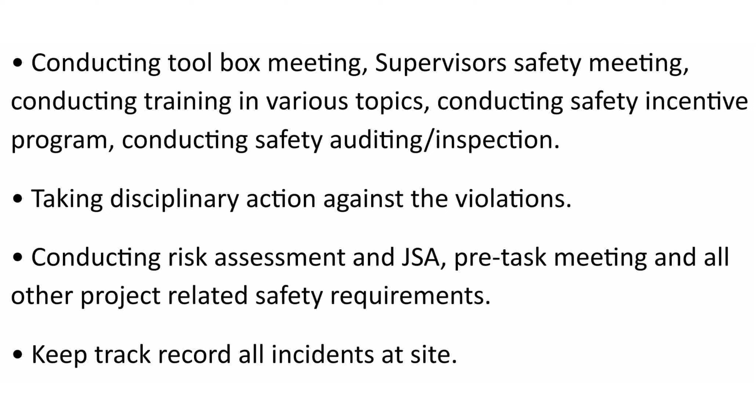He is to investigate hazards and dangerous occurrences, examine the cause of accidents, carry out safety inspections on site, and see what remedial steps and actions have been undertaken.

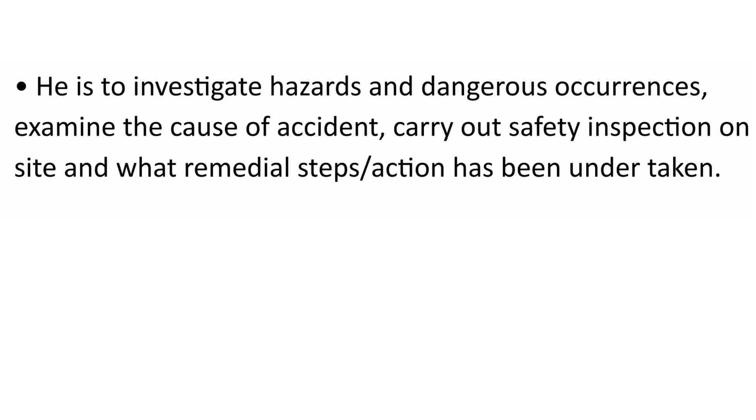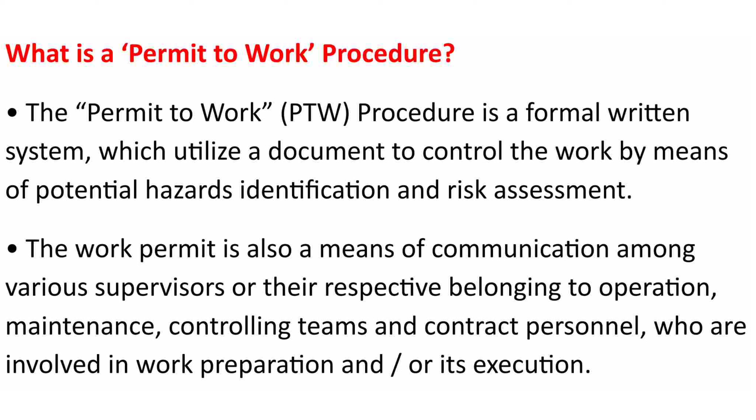Question: what is a permit to work procedure? The permit to work, PTW, procedure is a formal written system which utilizes a document to control the work by means of potential hazard identification and risk assessment. The work permit is also a means of communication among various supervisors or their respective teams belonging to operation, maintenance, controlling teams, and contract personnel, who are involved in work preparation and/or its execution.

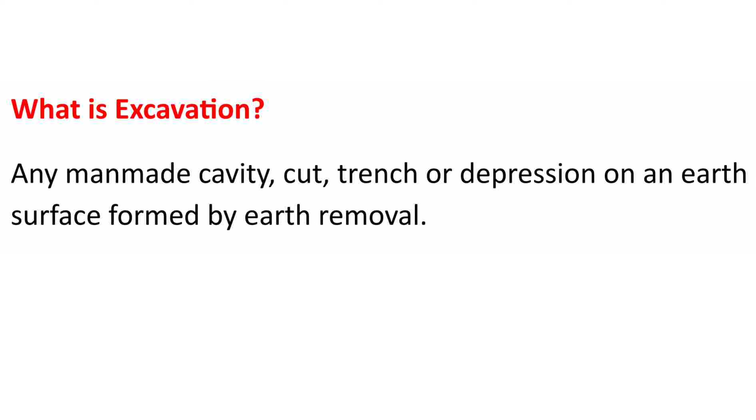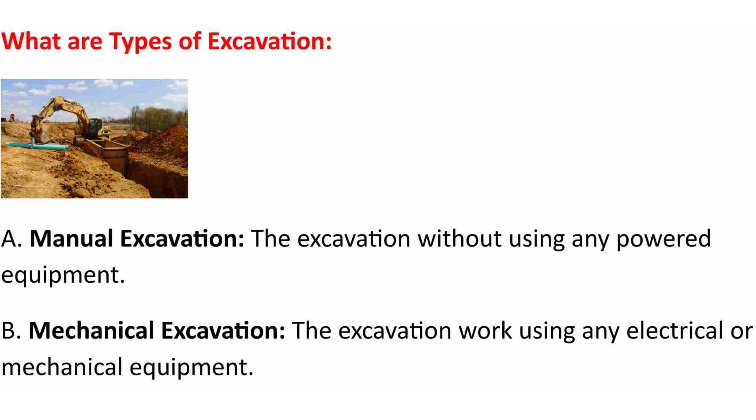Question: what is excavation? Any man-made cavity, cut, trench or depression in an earth surface formed by earth removal. Question: what are the types of excavation? A. Manual excavation, the excavation without using any powered equipment. B. Mechanical excavation, the excavation work using any electrical or mechanical equipment.

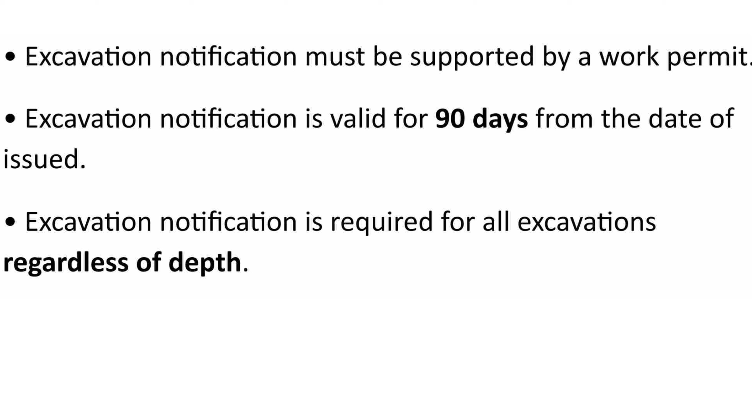Question: explain about excavation notification. Excavation notification is a document to notify concerned authorities who have responsibility and jurisdiction for safety and integrity of above-ground and underground services existing at the proposed site of excavation. Excavation notification must be supported by a work permit. Excavation notification is valid for 90 days from the date of issue. Excavation notification is required for all excavations regardless of depth.

Question: why is excavation notification required for excavation? Excavation notification gives detailed information about the underground facilities, and it is to be signed by all KOC concerned departments to confirm that the proposed excavation location has been identified and all safety measures have been taken for the existing underground facilities.

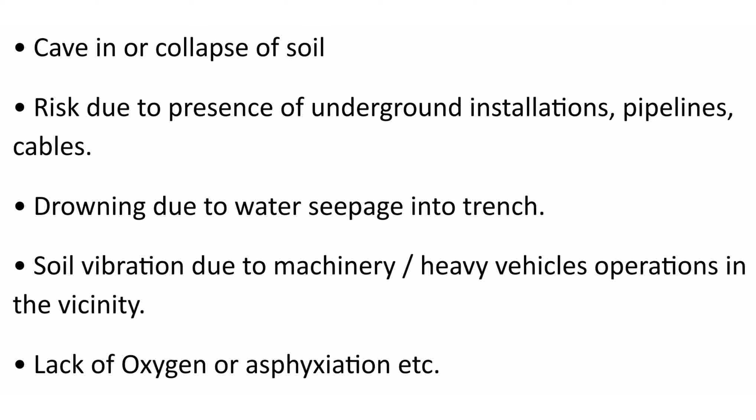Question: what are excavation hazards? Cave-in or collapse of soil, risk due to presence of underground installations, pipelines, cables. Drowning due to water seepage into trench. Soil vibration due to machinery and heavy vehicle operations in the vicinity. Lack of oxygen or asphyxiation, etc. Underground obstruction or damage to buried pipeline services.

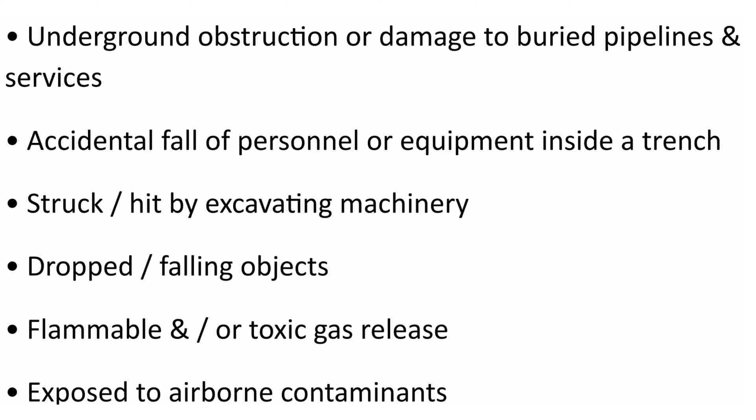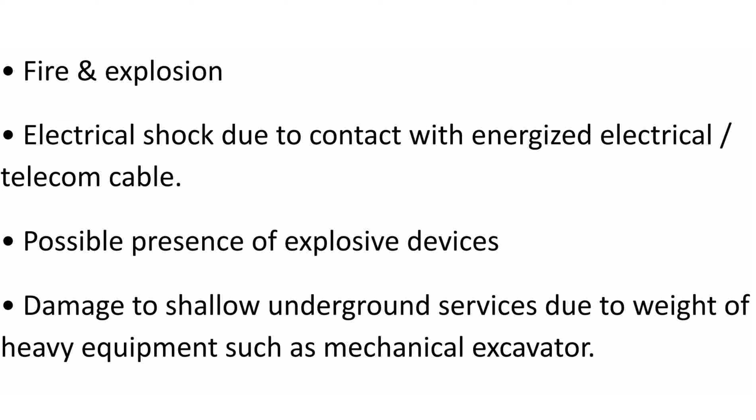Accidental fall of personnel or equipment inside a trench, struck or hit by excavating machinery, dropped or falling objects, flammable or toxic gas release, exposure to airborne contaminants, fire and explosion, electrical shock due to contact with energized electrical or telecom cable. Possible presence of explosive devices, damage to shallow underground services due to weight of heavy equipment such as a mechanical excavator. Encountering wet soil mixed with water, or reaching the water table.

Question: what are the safety precautions required for a safe excavation? No excavation work in KOC area without clearance of explosive ordnance disposal, EOD. No mechanical excavation closer than 5 meters to any hydrocarbon carrying pipeline. No mechanical excavation closer than 3 meters to non-hydrocarbon carrying pipelines, cables, and services.

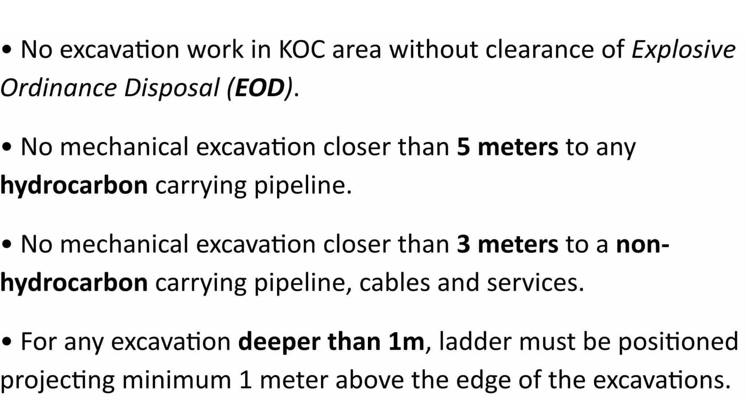For any excavation deeper than 1 meter, a ladder must be positioned projecting minimum 1 meter above the edge of the excavation. Ladders shall be provided every 7.5 meters, 25 feet, of lateral travel in the trench. Ladders shall be securely supported at the bottom as well as at the top. Excavated material shall be placed 1 meter from the edge of the excavation for depth up to 1.2 meters. Accordingly, placement of excavated material shall be increased in proportion to the depth of excavation.

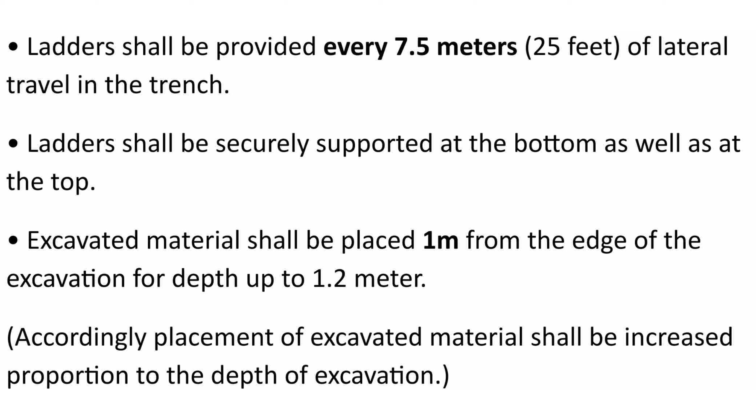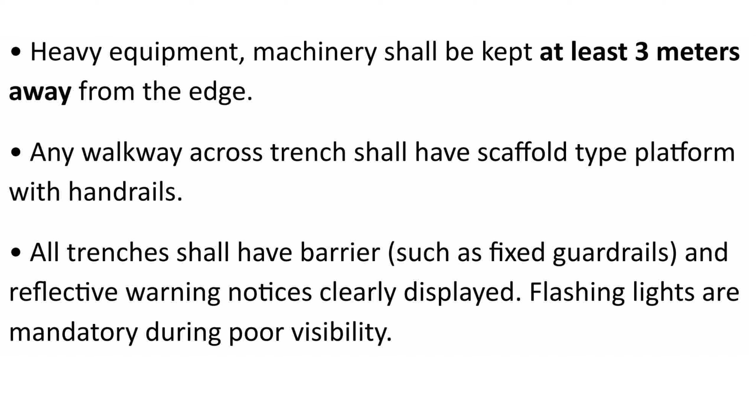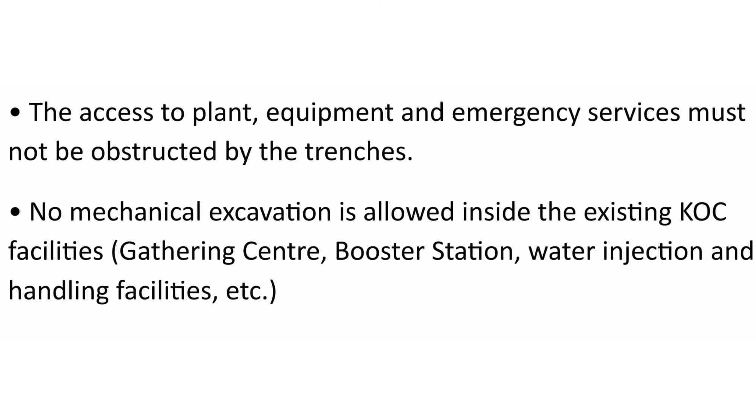Heavy equipment and machinery shall be kept at least 3 meters away from the edge. Any walkway across a trench shall have a scaffold-type platform with handrails. All trenches shall have barriers, such as fixed guardrails, and reflective warning notices clearly displayed. Flashing lights are mandatory during poor visibility. The access to plant, equipment, and emergency services must not be obstructed by the trenches. No mechanical excavation is allowed inside the existing KOC facilities, gathering center, booster station, water injection and handling facilities, etc.